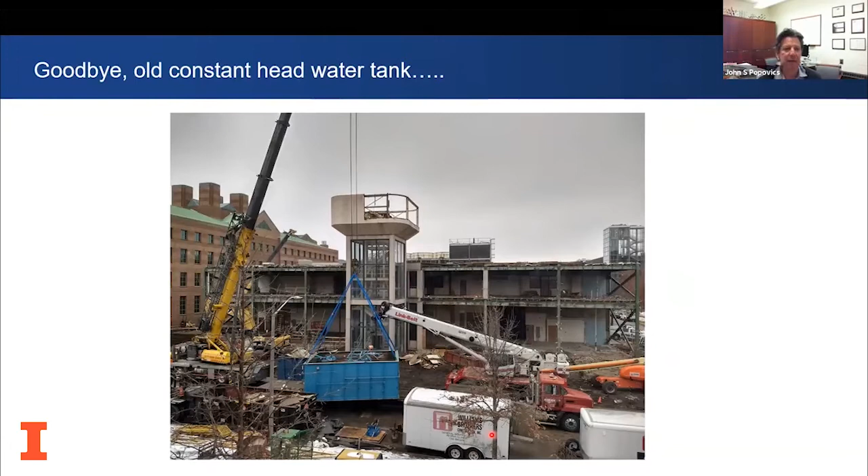A little bit about this building - it offers a lot. We have classroom space, faculty and staff offices, lots of graduate student space, teaching and research labs, really nice collaboration spaces, conference spaces, and display spaces.

We have conference rooms and these really nice, well-lit, cool collaboration spaces. This one is the Judith and Jon Liebman Gallery collaboration space. So just to give you a flavor, this building offers a lot. And the Ven Te Chow Hydrosystems High Bay is right here.

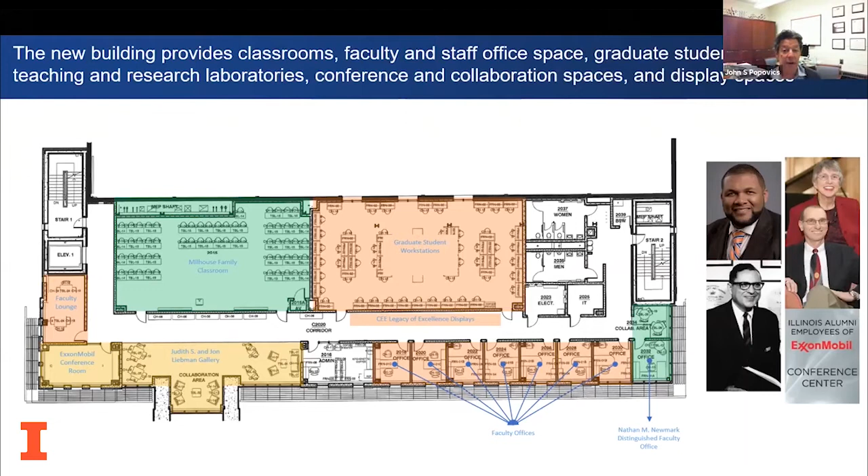Now, to give you an idea of the neat, innovative teaching spaces in the new building, I'll give two examples. I want to thank Professor Jeremy Guest for helping me out with this material. What we have here is the new Vernon L. Snoeyink Water Chemistry Laboratory, a large teaching space on the ground floor meant to be a teaching lab.

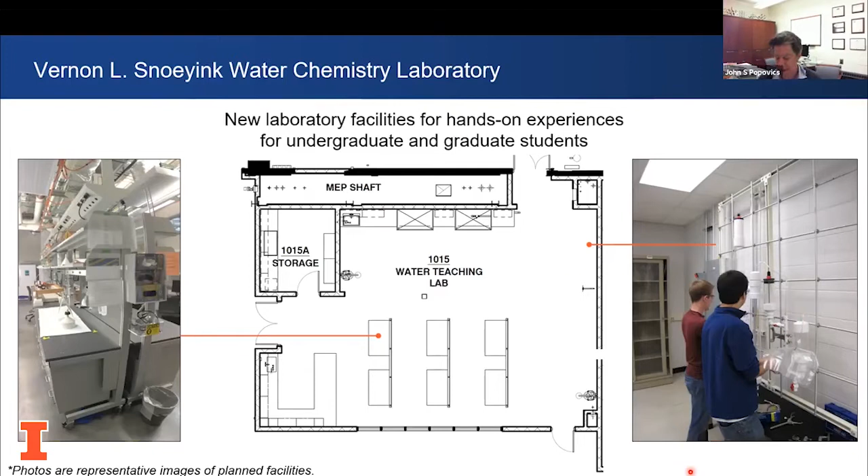Another very interesting lab, again courtesy of Jeremy Guest, is the Resource Recovery Lab, located in the basement. This lab will use real-life wastewater from our building to help students understand source separations and streams in wastewater systems. Actual wastewater from our building will be recovered here and used in graduate and undergraduate labs. Really unique resources have been built into this building.

Jeremy Guest is online, so at the end of this, if you have any questions about any of this or anything else, we'd be glad to address those.

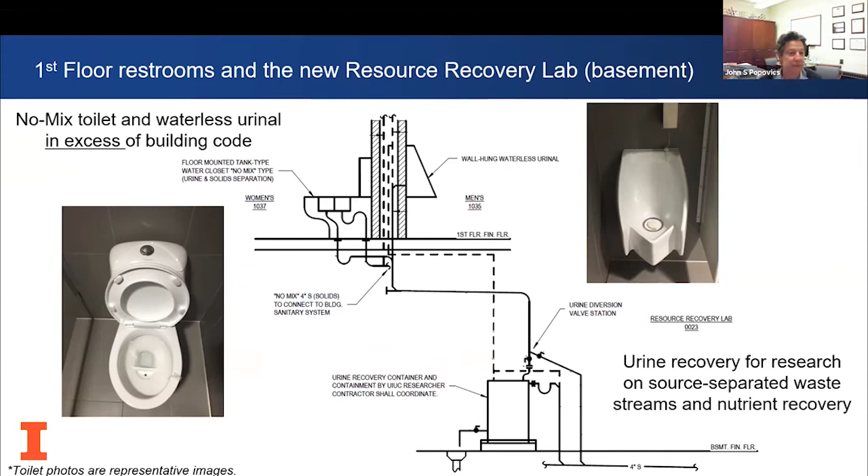Now, I thought some of you would like to see where we are right now. Yesterday I went to the building, still under construction. It's due to be finished in May or June. Here are some photos of the interiors for your interest.

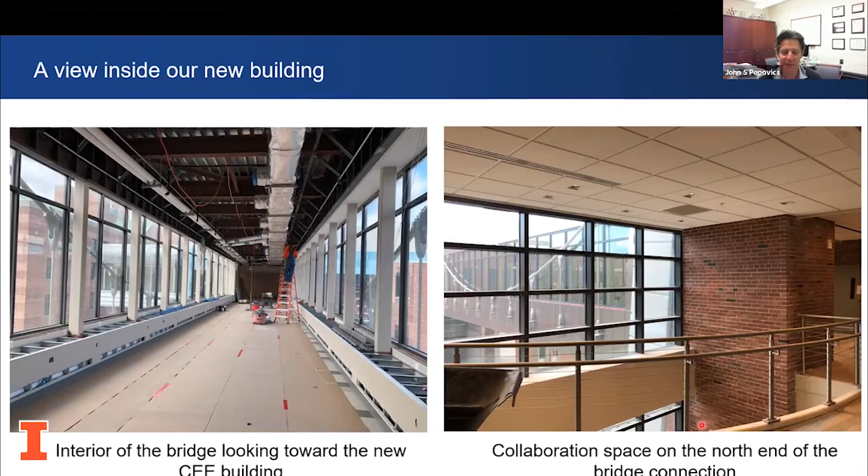On the right is a photo of that collaboration space, on the north end of the bridge, which comes out and spills into this area. This is a collaboration space, but you see this open area here looks down into another collaboration space, the Judith and Jon Liebman collaboration space, down below. Lots of very nice, well-lit, cool collaboration spaces. I'm hoping to convince you this building is going to be a very nice one.

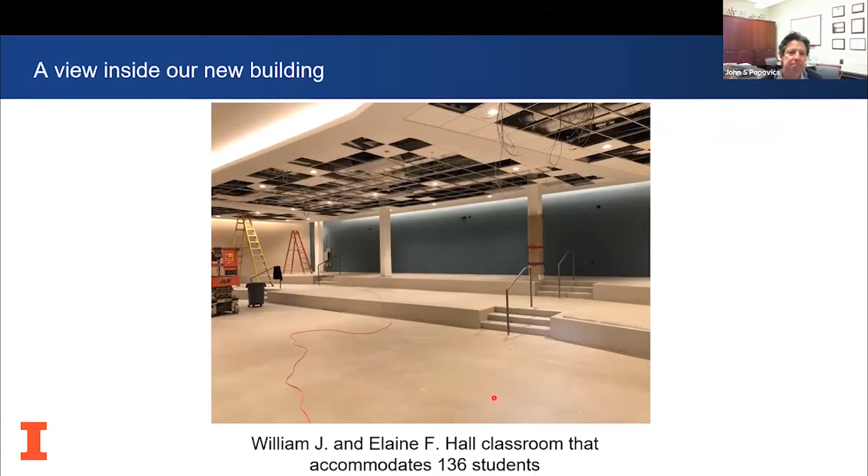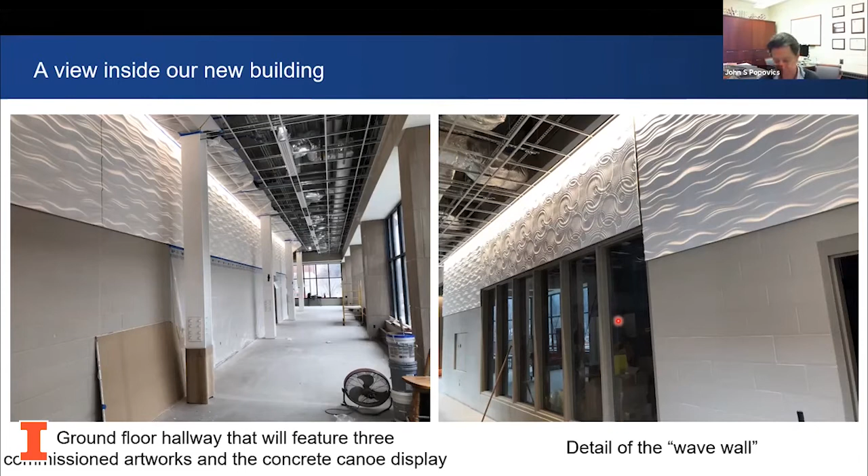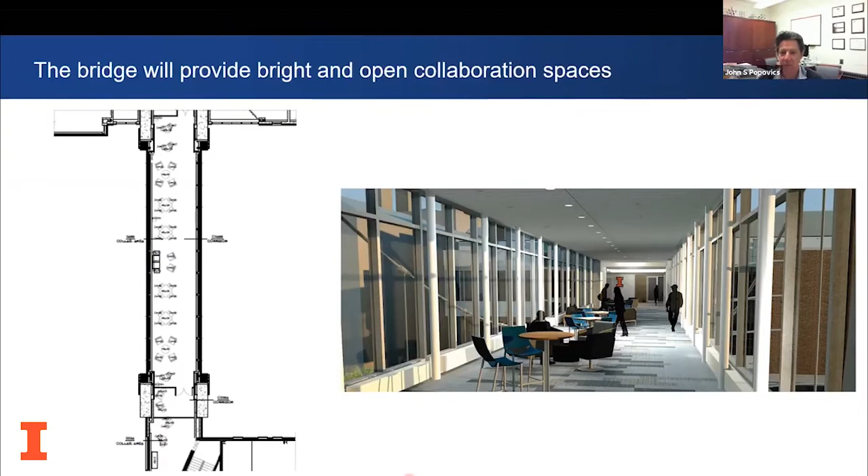And it's also an instrumented bridge, which will provide data and opportunities for student learning beyond anything we've ever had. So I'll kind of focus on that aspect now.

We will have an array of vibration sensors all throughout the bridge. They'll be hidden, so students won't see the sensors and the cables themselves. We've designed it so that they're not seen. But they'll provide lots of interesting data about the behavior of this bridge.

We also have expansion sensors, which monitor the expansion joints on either end near the abutments of the bridge. And then all this data has to be collected and stored and so on. So we have an acquisition and storage hub design.

So the idea is to provide a living laboratory for civil engineering students and their classes in years to come. By monitoring temperature changes and movements and so on, this can feed directly into structural systems class. The vibration sensor array can feed in directly to dynamics class and so on. And it gives the opportunity of the students to actually be involved in the data collection and so on.

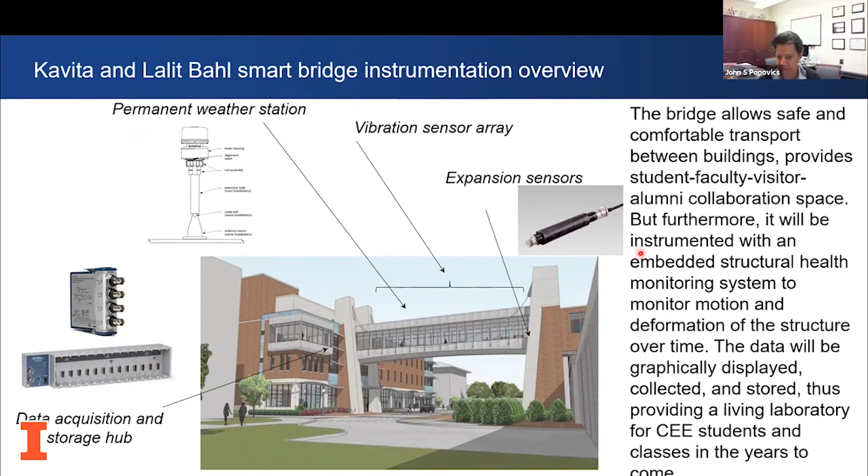All right, so let's take a look at what we're going to do here. I'm going to go over some details of some of these sensors really briefly, just to tell you what they're doing. First of all, we have a weather station, and weather stations don't look like the old propellers and windmills of the past.

They're modern and sleek and small and nondescript, but they provide a tremendous amount of data and information. So here you get wind information, directions, speeds, barometric pressure, temperature, RH, and all of that stuff in this little thing. This runs through the roof, and a cable runs to the data collection hub.

So we're continuously collecting these data. For instance, while continuously collecting data, we may have a huge wind event or a storm event. Well, we can monitor that, and we can monitor the response of the structure, which can be useful for students, and maybe it can be useful for researchers.

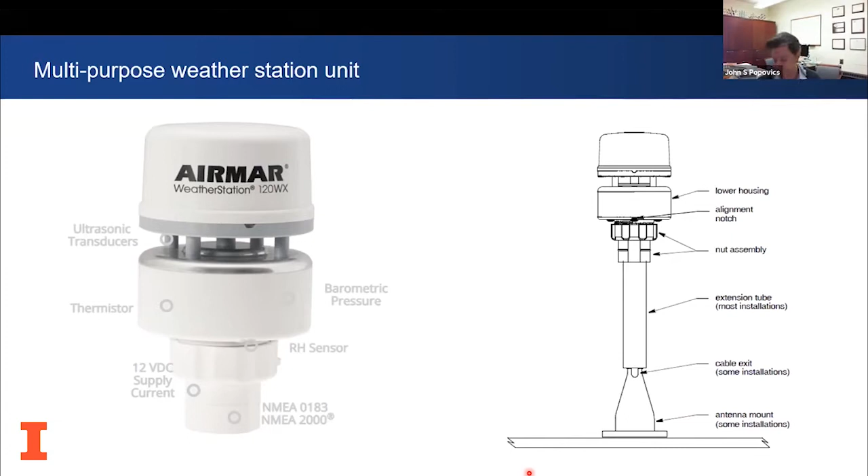All right, so these data will be continuously collected. Now we're also monitoring the simple expansion of this entire bridge. Bridges move a lot when they heat up and shrink when they get cool, and there are other influences like relative humidity. So we'll be monitoring all that. And this is a relatively simple case.

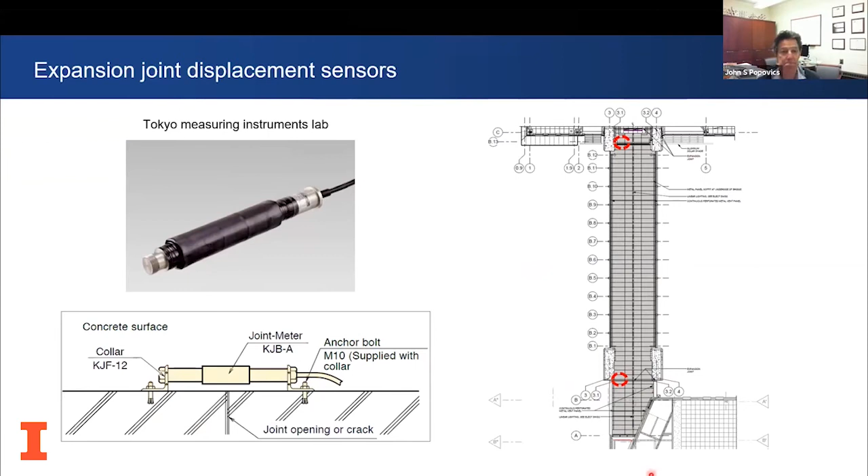Now I'll spend a little bit more time on the vibration monitor. In order to monitor how things move over time, that is how they vibrate, we need to measure motion at a lot of different positions and preferably in different directions. And that way we can build back the complete story of how this bridge, the structure, is moving under external load conditions like storm events, or by our own generated events. I'll explain a little bit more about that.

So we designed a dense array of sensors, and these sensors are called accelerometers, and basically they're motion sensors. They're monitoring the acceleration or the motion of a surface that they're mounted to.

Also on the roof level of the bridge, we've mounted 8 accelerometers. All of those again are horizontal, going east and west this way. This is designed to be able to capture all the meaningful modes of movement of this very unique structure, right? And again, this data will be collected.

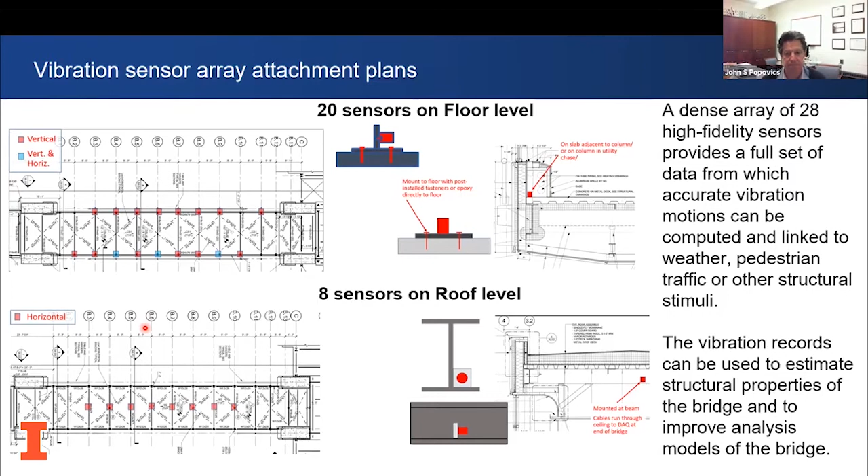So just a little bit of information for those of you who are interested in dynamics. The sensors, the accelerometers we are using are very high sensitivity, flat, low frequency accelerometers made by PCB. This can measure very accurately and consistently over a range of up to 200 hertz of vibration, and that's pretty wide range for structural measurements.

It can measure up to plus or minus half a G peak acceleration, and that's reasonable. The sensitivity is quite high, so we should be able to measure very small movements. And that's important because, as you may have seen or guessed from the drawing, this is a very stout structure. We don't expect it to be swaying a lot.

So the question is, what are the modes and can we measure them meaningfully with this system, right? We've designed the system to hopefully do that, to have the right sensors, have them in the right place, and have them in the right direction so that we're able to capture all of that.

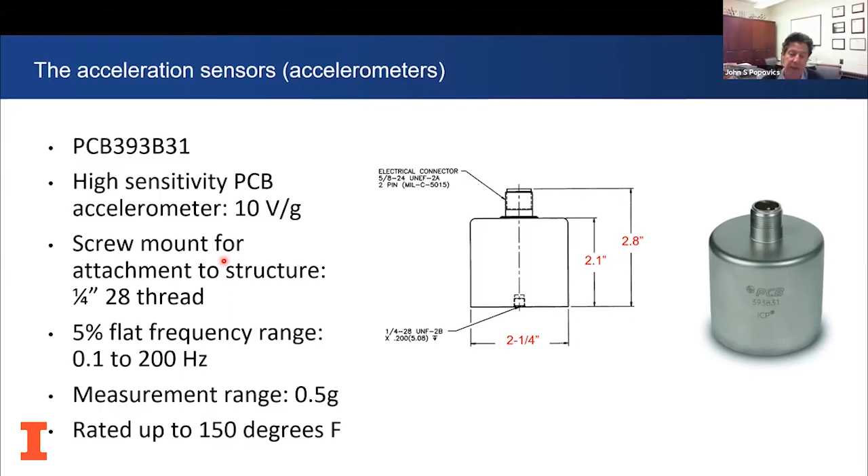And so all of our DAQ will be housed there. We have multi-channel DAQs, that's data acquisition systems, where the signals come in and have to be converted into a form that the computer can read and store.

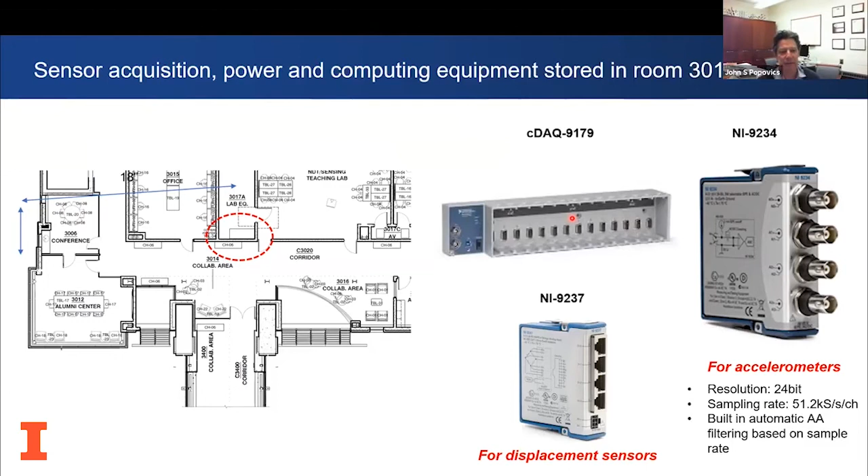So how did we design the system? How do we understand where to place them and what we need, and if we can even measure anything? Well, we had to come up with a model. I want to give credit to Nate Levine again, that's Professor Spencer's student, and Professor Spencer, for coming up with this numerical model to simulate the bridge.

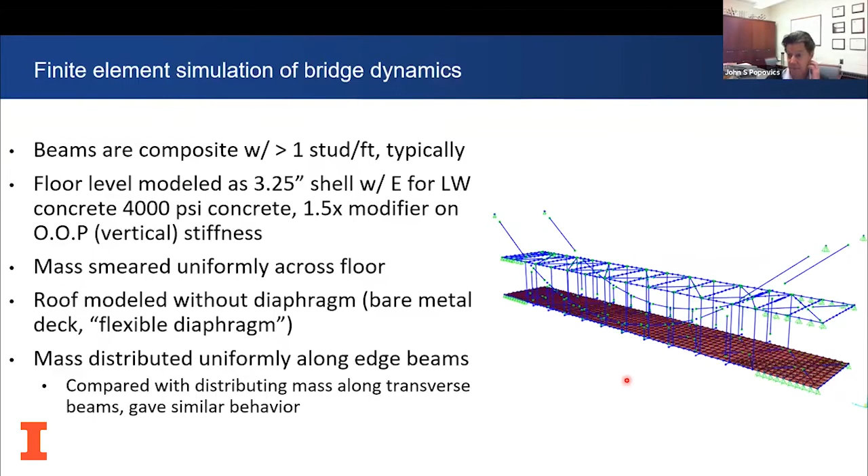So let's look at what this model says we have. What we have here are the outputs of the model, and what I'll show you are cartoons, animations which are exaggerated motions, but motions that the bridge we expect will have, at the frequency that is the repetition rate we expect them to have.

So the first one is the first vertical mode, called first because it has the lowest frequency. So we can expect that this particular bridge can move like this. If you've had a dynamics class, you can see this is an interesting feature: our model predicts that our lowest fundamental vertical mode has 2 nodes in it. If we look at the next overtone, it only has 1 node. That's kind of unusual.

So the model says that we have these fundamental movements at low frequencies, 3 and 4 hertz. Will the real bridge move like that? Well, that'll be interesting to see, and it'll be a great study for the students to evaluate and compare.

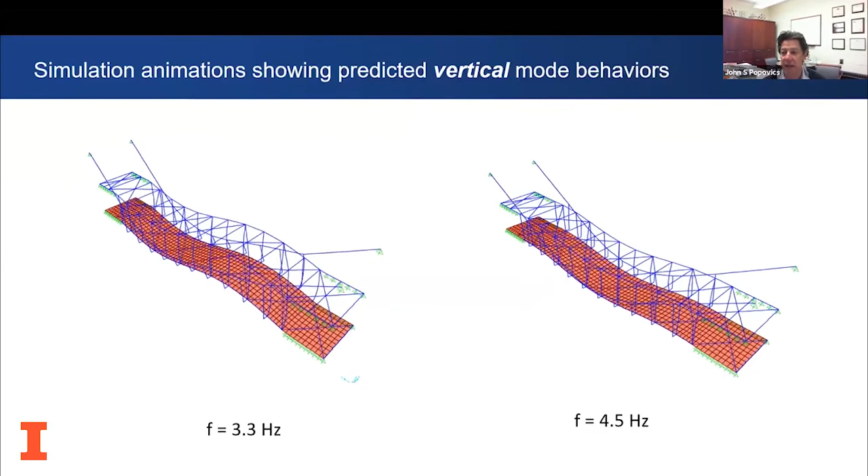So again, can we excite these nodes? I want you to remember this motion, especially this one, and the fundamental vertical motions you saw before. Remember what they look like and remember those frequency values.

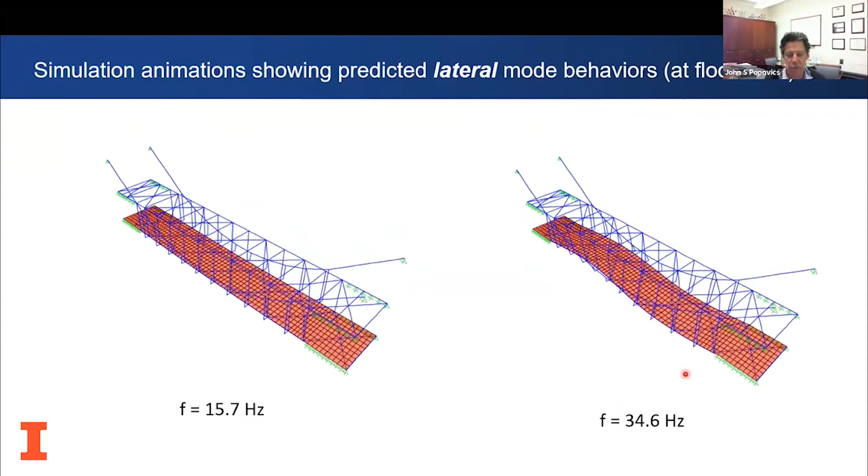We can expect some lateral motion. Here you see the fundamental lateral bending mode, which only has 1 node. That kind of looks like more what we expect. Then the next overtone has 2 nodes. So we can expect those kinds of motions, bending at the floor level.

But because of the differential stiffness of this structure from top to bottom, we can expect a different kind of motion at the top - a lateral mode at the roof level. So based on our models and the actual design of the bridge, this is what we hope we are able to capture due to external excitations such as wind and temperature.

And also internal excitations, like us jumping up and down, to see if we can excite those modes and how the structure really behaves, and compare it to the model.

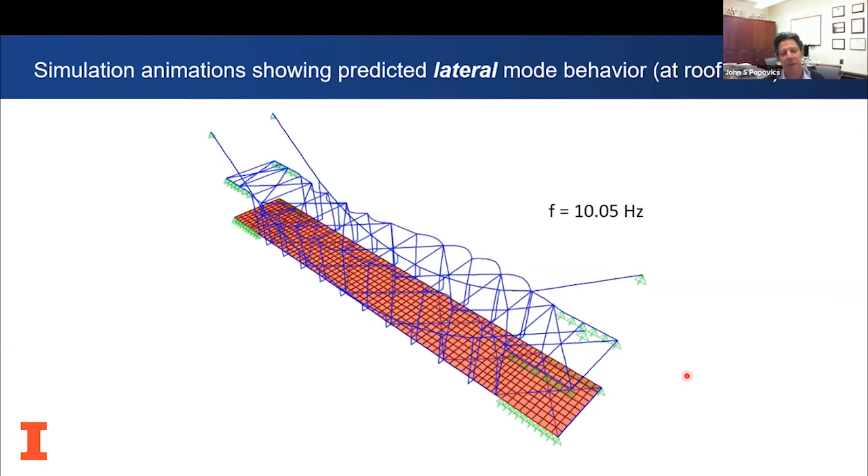From our model, I'll show an output from this particular accelerometer mounted on the floor. We'll simulate 2 typical human heel drops at the center of the bridge going vertically, so the force is going up and down out of the screen, and then one also going up and down but offset from center.

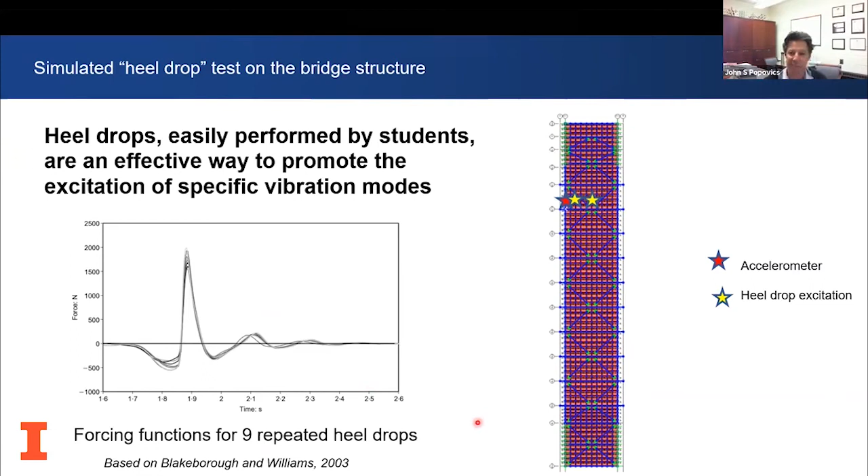I want you to remember those motions. So when we have a heel drop in the center, perhaps we can expect some vertical movements - maybe not torsional or lateral bending. Offset from center, maybe we can expect some vertical and some torsional movements, but probably not any lateral bending modes since we're not exciting it that way.

That's exciting news for us, because we had some concern that this very stout, stiff bridge would be very difficult for students to excite these modes and use conventional methods to get these modes of vibration and measure them. But our model suggests we're fine—our system is good, we're measuring the right things, we're using the right tools to measure them. We'll be able to get meaningful data, not only from external excitations like wind or storm events, but also from students doing heel drops and people walking across the bridge.

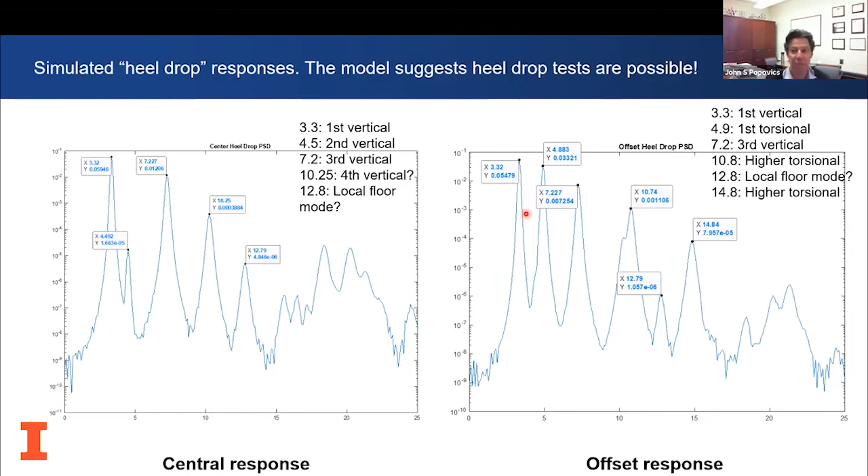Another nice feature is that the bridge is not only the bridge, but the abutments underneath the bridge. The abutment is where the loads are transmitted from the bridge. Another faculty member, Dr. Tugce Baser, developed instrumented foundations under the bridge too, and I'll talk a little bit about that.

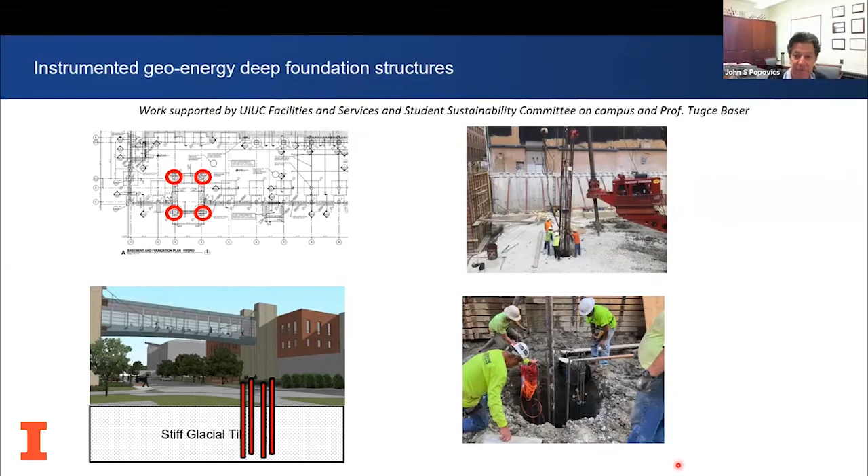Dr. Baser wanted to acknowledge that this was done in collaboration with F&S, our Facilities and Services, and the Student Sustainability Committee on campus, because these are instrumented geo-energy piles. There's a lot of interest in this kind of technology from a sustainability point of view, and the university is very interested in this technology.

Just a snapshot—we're looking here at Newmark, some of you will recognize that. We're looking south, and there are different kinds of sensors mounted directly into the cages, which are placed into the holes in the ground. We have thermistor strings, strain gauges to measure strains, and temperature is also important. We have a fiber optic cable running all the way through, which also measures data such as temperature.

So sophisticated technology in these piles—they're drawn out, data logged, and used first of all to monitor the long-term performance of these energy piles: how are they doing, will they continue to be efficient over time? Plus, it provides data for classes that deal with this—for instance, our advanced graduate level deep foundations class, 585, can make use of this data.

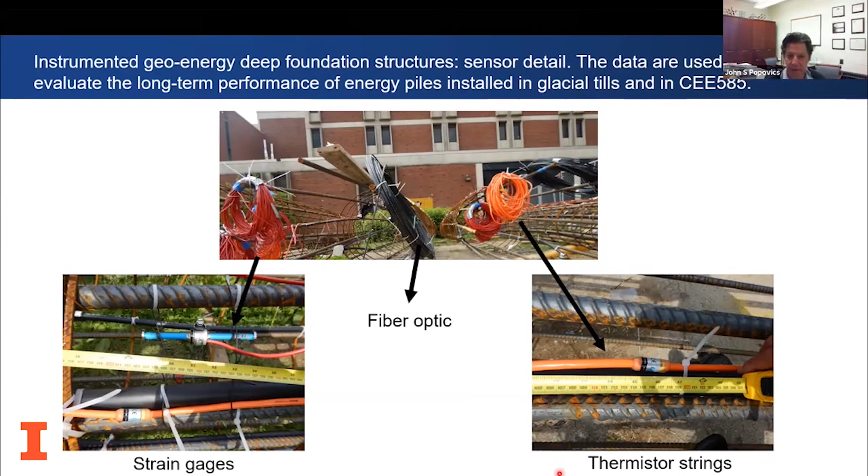So I'm at the end of my talk, and I wanted to say, what's next? I think this, what we call phase 2, the new civil and environmental engineering building, and especially the Kavita and Lalit Bahl Smart Bridge, really builds on great improvements we've made to our infrastructure. That great improvement is the Jeffrey Yeh Center, which many of you may not know, but it was finished, I guess, over 10 years ago.

It was built on the northeast corner of Newmark, and it provided great new teaching space for us, which we were very short on in Newmark. Newmark was a great lab, but it didn't have much teaching space. Here, it provides great collaboration and teaching space.

At the time, through some wise decisions from leadership—in particular I'll point out Benito Marinas, Bob Dodds, and Jeffrey Raisler—we decided to invest in the best lecture capture technology and distance learning technology that we could. And we did. All of the classrooms here and all the classrooms in the new building were outfitted with this. This was well before COVID—we were ahead of the game.

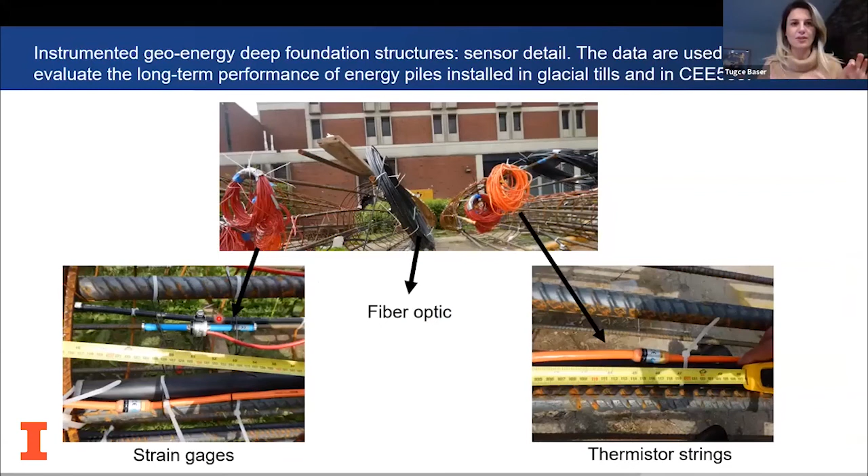And I see another question, I'll just continue. What depth do the piles sit at? So they're at 60 feet below grade, maybe 65 feet, because there was an issue during the drilling. We encountered a very loose sand layer, so we were scared that it was going to create a problem, and we drilled a little bit deeper than that.

Great, thank you. Next question from Wissam. How are you measuring the weight of the pedestrian traffic going onto the bridge? I am assuming this information would be important to tie the structural behavior to the acting load. You're right, that would be useful information, but we did not put in any kind of weigh-in-motion or anything like this. So we don't have any system that can measure the loads. But what we can do is initiate standard or known loads, like for instance a heel drop. Now, what is the level of the heel drop in terms of actual loading? We won't know unless we measure that separately. But we can have those, and we can also have rolling loads of known weight. Unfortunately, we couldn't work in this weigh-in-motion feature.